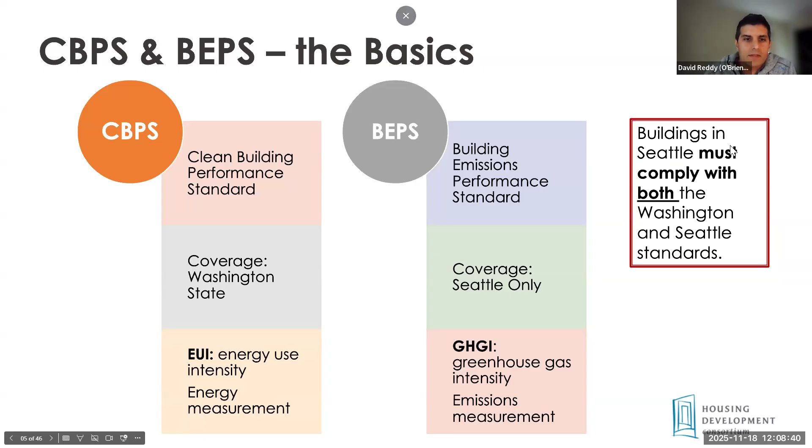Next slide, please. Laura, can I get the next slide? Thank you. So in this section, we're going to talk a little bit about substantial alterations and the two corresponding other provisions in the code that can trigger full compliance with the energy code.

And just fair warning, I'm going to provide code references and we're going to talk about the codes, but we're going to try to keep it high level enough so that people have an understanding of these provisions and at least know where to go, or have your consultants go, to make sure they're familiar with the code as they work with the city. So moving into the next slide after that.

So these are the sections that apply. We're going to talk about each one. In the Seattle code, there are definitions of substantial alterations, and generally speaking, these are the provisions that if you trigger them, require full compliance with the energy code. But there are a lot of exceptions, and we're not going to get into all of them, but just be aware that if you're doing any of these activities, it could trigger full compliance with the energy code.

Substantial alteration is a provision in the code that only exists in Seattle. It does not exist outside of Seattle, so keep that in mind if you're looking at projects outside. But there are alteration provisions, especially in the energy code, that exist in the state energy code that you need to be aware of.

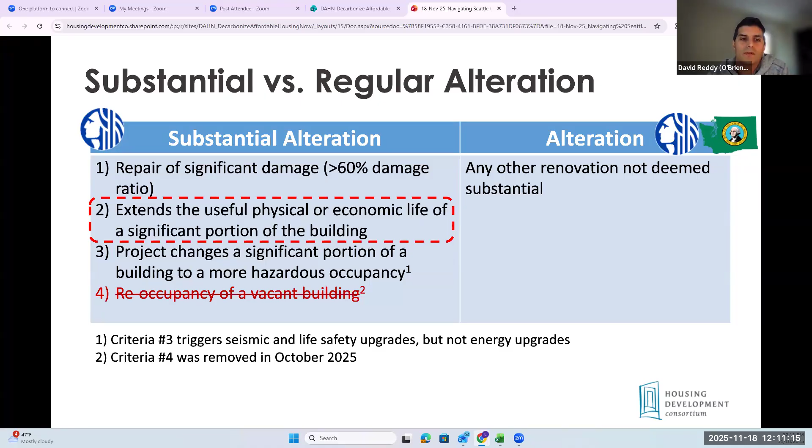Just recently, the council and the mayor passed some revisions to the definitions of substantial alterations. They include an exception for partial change of occupancy - less than 20% of the gross square footage, small spaces or buildings. And the most important one for today's topic: if the alterations are substantial, but are made to replace fossil fuel or electric resistance systems with heat pumps, then those changes, generally speaking, are intended not to trigger substantial alterations.

Within the substantial alterations code, there are exceptions for meeting Seattle Energy Code. Not all may be applicable to your projects - landmark buildings, but you still do need to make strong efforts towards compliance with the energy code, seismic retrofits, and small residential buildings. But again, that is just exceptions from the Seattle Energy Code, not the other provisions of the code that might be triggered by a substantial alteration determination.

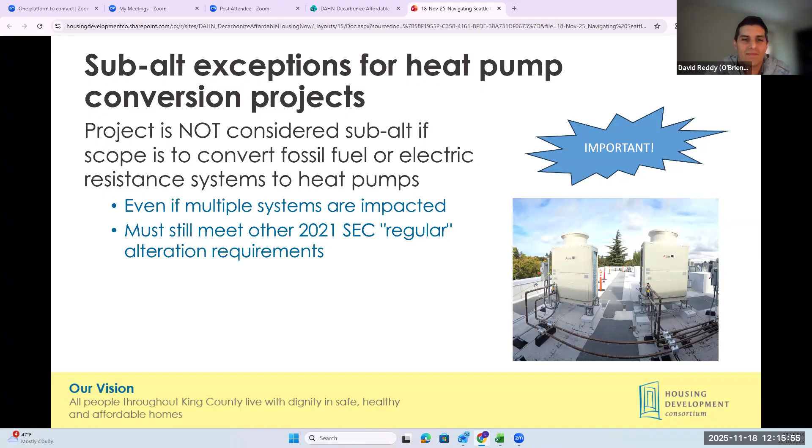Next slide. Some other important updates: even changes to the building that are needed to facilitate these conversions are also allowed to be made without triggering substantial alterations.

This includes structural changes to support new equipment, mechanical changes for airflow reasons, and electrical—one of the biggest issues to come up on projects, which could include a main service upgrade and not just new panels. Most recently, what we're hearing from SDCI is that even envelope insulation updates, like window upgrades, adding insulation, air sealing, and adding ventilation systems that meet the new heat recovery requirements, would not count towards triggering a subalt.

You can see that whole list—those are all things you just need to do to make the heat pump system work, and therefore they've been encompassed in all of this.

What's been the city's hesitation is that substantial alteration has always traditionally included seismic and life safety upgrades and other things that are also critically important to people. So for this one, we're making an exception, saying okay, we'll let all that other stuff go—you can switch to heat pumps and do these things necessary to make the heat pump system work.

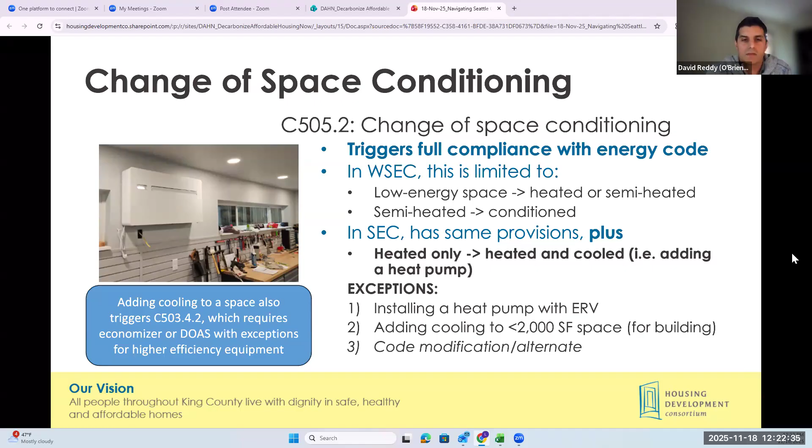We saw this just a couple of months ago. Somebody was converting some retail spaces that weren't being used on their ground floor to apartments, and they went through that whole change of occupancy process. Duane, my experience has been the city is very open to working with people doing that to find an adequate compliance path that doesn't trigger full compliance.

Is that right? The city's highest priority right now is getting more housing built. And in this current climate with interest rates and land costs and everything, it's tough. So we're trying to push that as best we can, and we're also not letting go of our environmental ambitions.

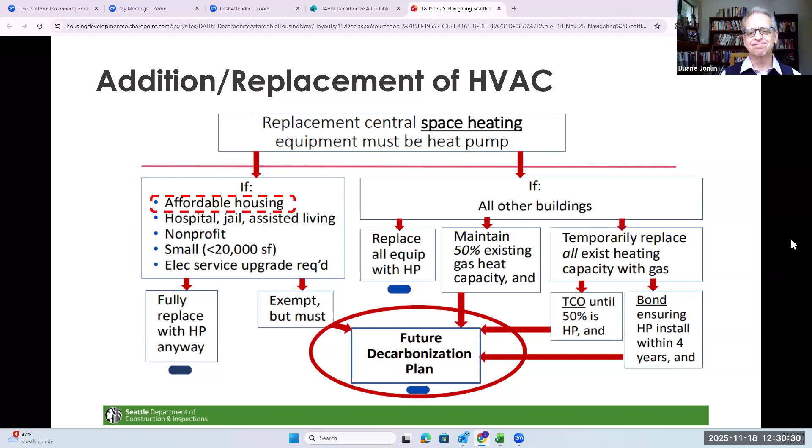All right, and I guess the same argument here on water heating. So affordable exempt plus decarb plan, and basically the same provision as we just talked about for space heating. I don't think there's much more to say here. It looks pretty parallel between space heating and water heating. Is there anything more unique here to add? They're all on the same path. I would say the exceptions have language that is slightly different for space heating versus water heating, but the general concept is the same.

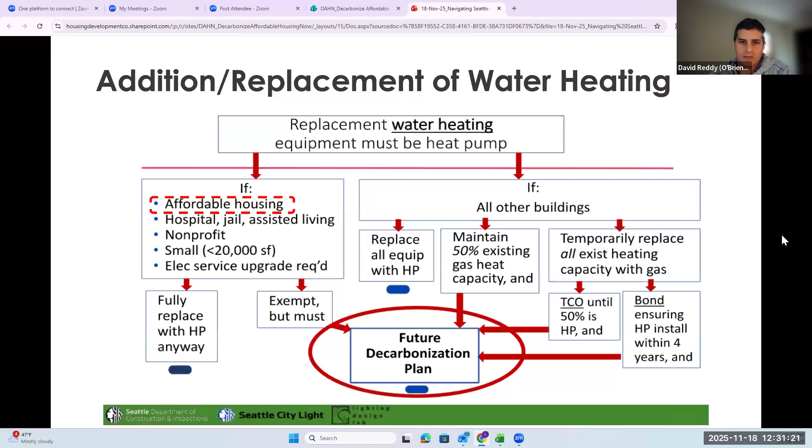And then this is a slide that shows what a decarbonization plan is. The city defined this as, basically you've convinced yourself that you can decarb this, and then they want to see it, so they want to see your plan. Things that would go in there: does this thing fit? A quick one line on what it is we're replacing. Do we have access to outside air? Do we have clearance around ducts? Do we have a place for equipment, structural modifications? So it's really doing a full feasibility around decarb.

And this is a very typical way to approach a feasibility study. Obviously structural, electrical are a big deal. Partitions, any ratings in the buildings. You do run up against roof coverage and height issues when you're replacing small gas equipment with larger heat pump equipment, so you have to make sure you've got a place for the outdoor unit. Heat pumps need access to outside air, super important.

There is the decarbonization planning form, which will help guide you as you're filling out and coming up with your decarb plan. There's also a schematic cost estimate so that you can get this into CapEx in case it ends up being an emergency. And then you want to list your compliance dates for BEPS and CBPS, but mostly in Seattle, BEPS. If you took as a general statement that design for an alteration project is about 10% of a construction project, and schematic design is about 10% of the design contract, then we're talking about spending like 1-ish% of what it would actually cost to do the work, just to make sure everybody's clear about what it's going to take. You don't have to do this plan. You're not obligated.

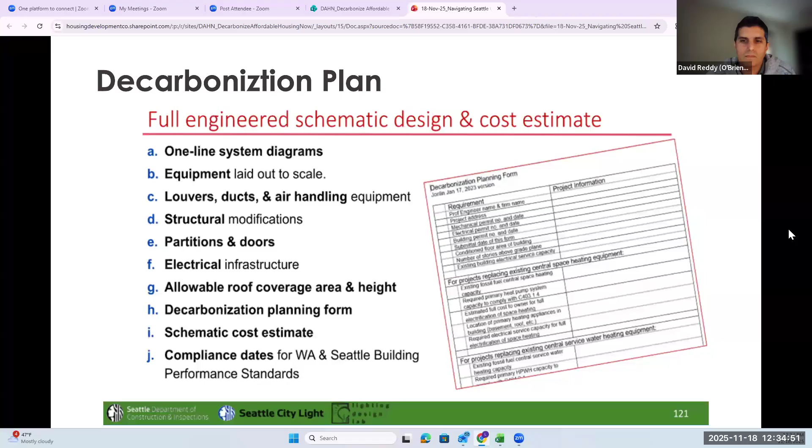All right, I'll take over here to real quickly walk through this. This is more for probably architects and engineers, but if you're an asset manager or construction manager, just to give you some background on how I've approached getting started with permitting a major decarb project.

So the order of operations is: one, define your scope. This is based on the assumption you're going to have a pre-sub meeting, which we're all strongly recommending, to talk about your project and get that early determination of whether it's a substantial alteration or not. That involves scheduling a pre-sub meeting, follow-up, and moving forward from there.

So this is all work you don't even necessarily need that decarb plan for, I would say. I think the decarb plan gives you a lot to work with in this conversation with the city, but it can be narrative form, basic drawings. That's the kind of effort I've found successful to get an early substantial alteration determination.

Next slide please. So again, defining the scope can come out of your energy auditing or your decarb plan. Just a plug here: DAHN and OSE are developing what's called the Decarbonization Readiness Guide, which should be out by the end of this year, that can talk through this planning approach.

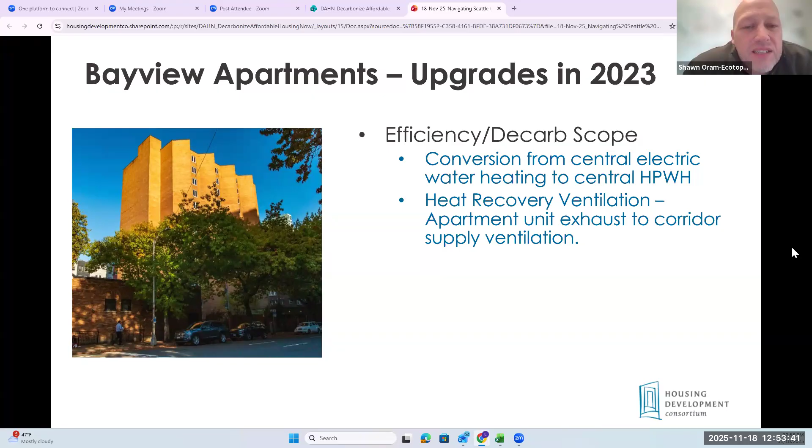Summarizing Bayview: the original electric DHW system was a COP of 1, an electric resistance system. This building was built in '76, 100 units, 14 stories. The hot water heating system went from a COP of 1 to a COP of 2.6. This was also a project where we showcased a factory-built option. The entire system was switched over in about 3 hours, so barely any disruption. This was a pretty successful project.

We're now looking at doing some more experiments with that particular heat pump around load shifting. So this is installed and operating.

The existing electric system is shown at the right, and that was what was there. We replaced the electrical and turned that into the swing tank, then put the heat pumps outside with some more storage. You can see a skid added to the existing system. The existing hot water plant was valved up to accept this skid, and the whole switch-over happened in the middle of the night.

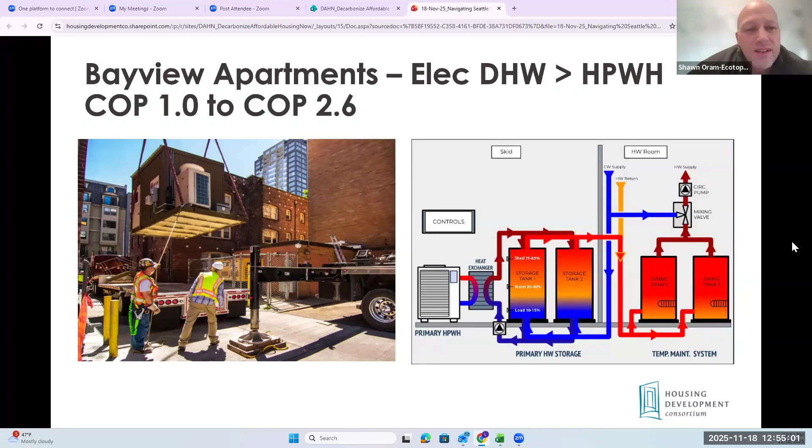Now I want to talk about the heat recovery ventilation. This is what was currently there when we arrived—a typical high-rise ventilation shaft, with exhaust ducts in all the residential units coming up through subducts out to rooftop fans. That particular fan installed here was very oversized.

Part of the scope was to reduce that fan and put it on variable speed pressure, and also try to take some of that exhaust air out of the residential units, recover that heat, and use it to heat up the corridor supply air, which is currently using gas to provide space conditioning. One thing to point out is this shaft was actually partitioned—there's a kitchen side and a bathroom side. This is a 14-story high-rise, but the shaft is partitioned; it was built that way. It's important for what's next.

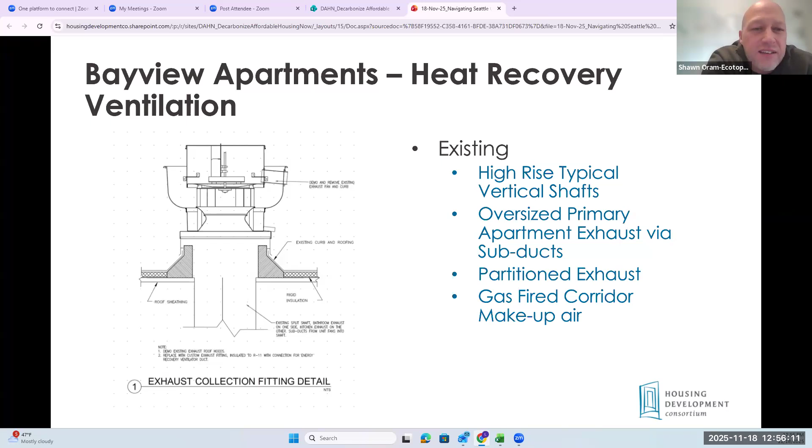You can see what happened. The fans on top were about 5 feet tall, and they were 5 times the flow that was needed in all the apartments. The retrofit involved putting a much smaller fan on, extending the partition in the duct up and around, and pulling off the non-kitchen side of the exhaust into an ERV, which is then used to supply or temper air for the corridor system.

That fan at the top runs on pressure—just enough to maintain about 0.05 above the shaft to maintain positive flow in all the units. There's a huge stack effect here, so we get a big boost of airflow naturally.

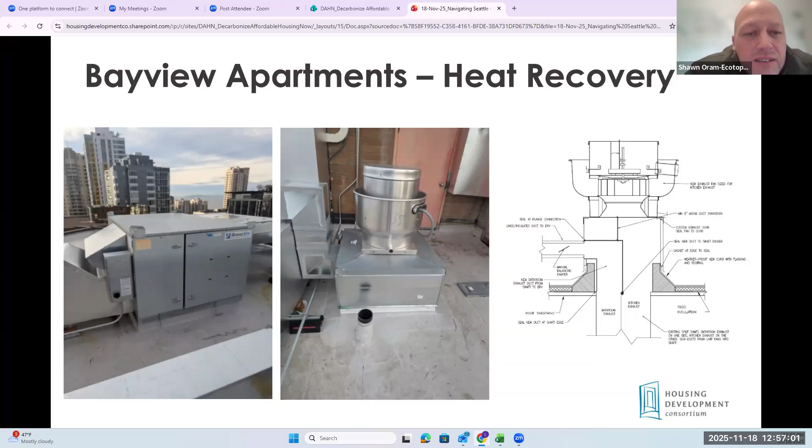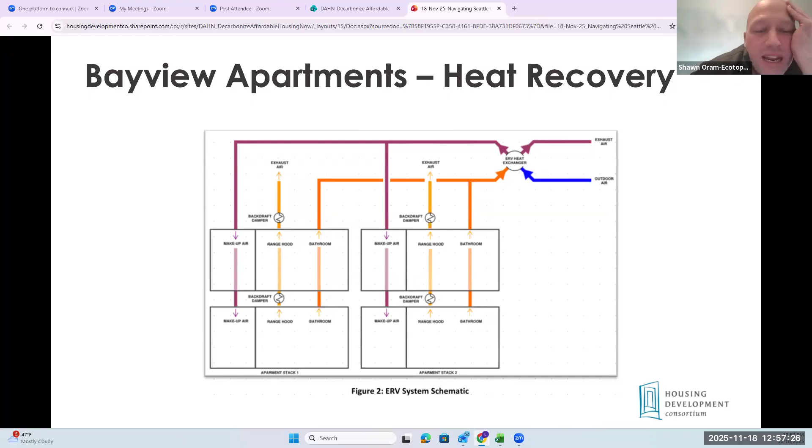This is getting into the weeds a little bit about how the heat recovery was performed. We're just pulling out of the bathroom groups. The kitchen exhaust was left - it's not range exhaust, it's just kitchen room exhaust, continuous. And then the heat recovery happens.

In terms of what we're talking about today, the hot water system was existing electric, replaced with a heat pump - pretty straightforward. And the ventilation system, that heat recovery happened. There was no impact to the inside systems - all the work was done outside of the envelope up on the roof. This was permitted in 2021.

Thanks, Shawn. Yep, just two more slides here. Denny Park is a development in South Lake Union, and it's currently in the stage just past feasibility.

Basically, we outlined the scope of a number of measures to decarbonize the building. We met with City of Seattle to describe the program through the whole process, and determined it was not a substantial alteration. This was before the recent legislation to codify some of the changes that have happened, but we did some modeling to demonstrate the impact of all the measures that will be done, and cumulatively they will all bring the building into compliance with BEPS, which is what we mentioned in the beginning as driving a lot of this work.

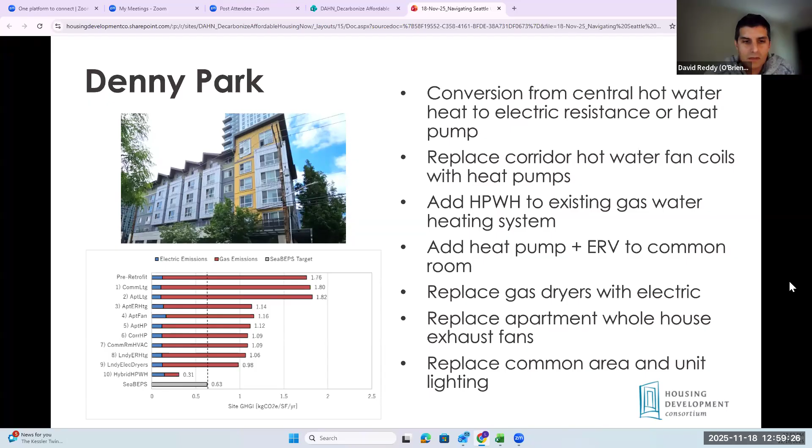1811 Eastlake is a permanent supportive housing development, again in the South Lake Union area. This was even more substantial - major significant upgrades, conversion from a hot water heat system to a two-pipe heating and cooling hydronic loop, new heat pump water heating, replacing the roof with insulation, lighting, controls, ERVs for the apartments. Very significant scope, all presented to SDCI and determined not a substantial alteration, again bringing it all within compliance of BEPS.

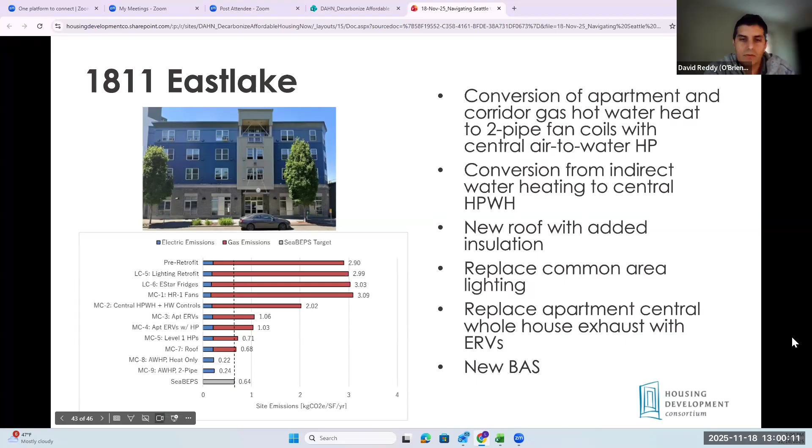So those are just two examples. This shows what we're talking about here. I'll hand it over to Dwayne if he wants to make any last comments.

I would highlight Andy's contact here - his information can help answer questions and facilitate scheduling on these. He did help me out, it was very helpful. So just a few parting shots here.

Basically, things that are new going into your building have to meet code - new windows, new water heaters, whatever. Existing stuff can, most of the time, with very few exceptions, just stay there forever. But we've already talked about the pre-sub conference - that's less than $1,000, and you're going to save way more than that by making sure you got all those things worked out. Notice that with heat pump water heaters, there's 3 separate permits that are needed, and sometimes an electrical permit as well. So make sure your engineer's clear about all the applications that have to be made.

There's an exception in the code for alterations - you don't typically have to do C406 credits or solar if it's just a simple alteration and not a substantial alteration. And finally, for most alterations, air leakage testing is not required either. You'll find those in the code.